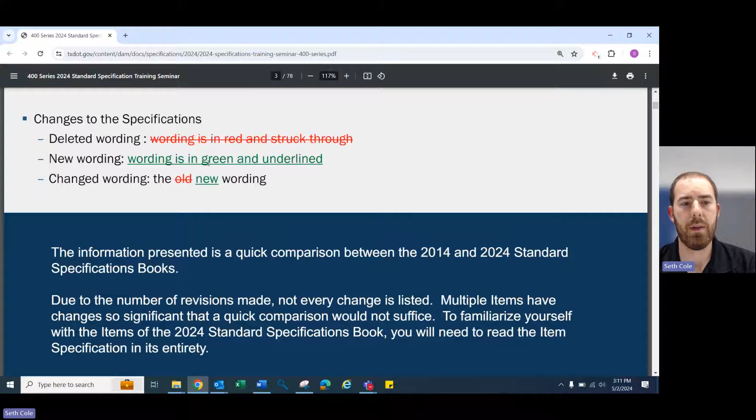As a brief overview, there were 62 items in the 2014 spec book. 2 of them are being retired. There are 2 new items in the 2024 spec book, and so there is still a total of 62 items in the 2024 spec book.

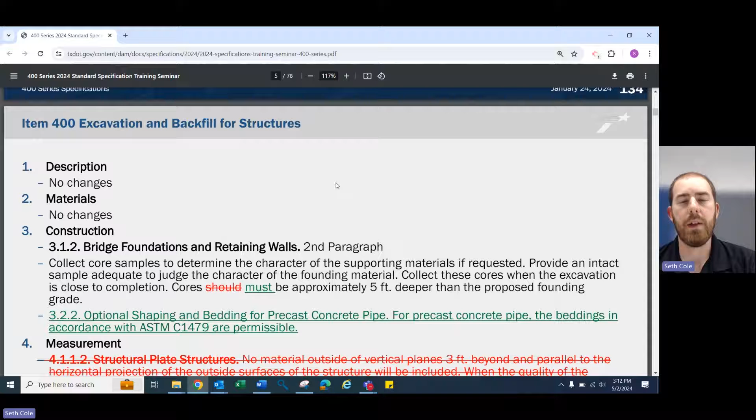Item 400, excavation and backfill for structures. Really no major changes here. A lot of the changes are mostly editorial in nature. I added a paragraph for optional shaping and bedding for precast concrete pipes.

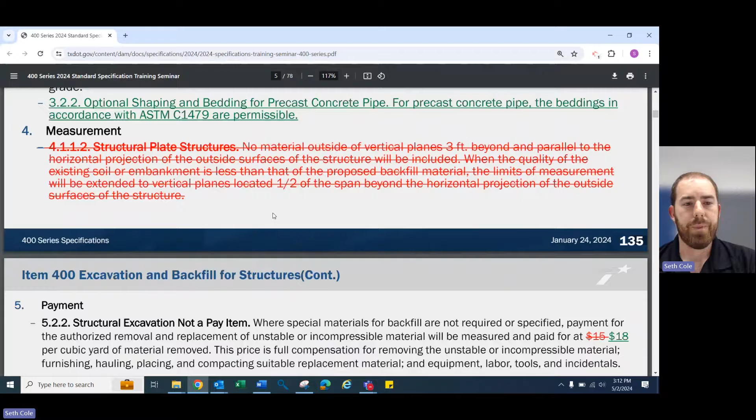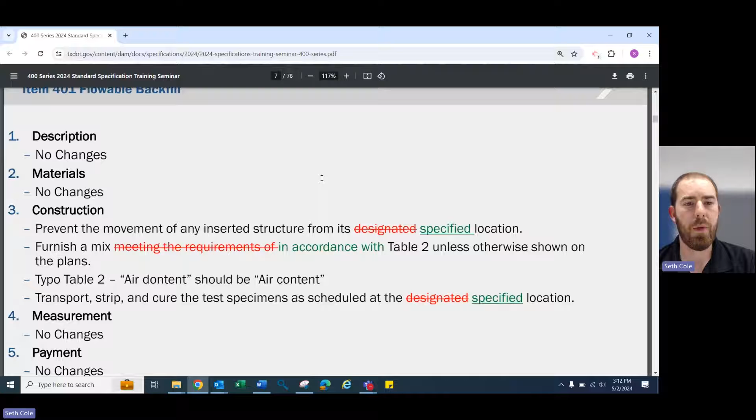Changed some of the payment for when structural excavation is not a pay item. And item 401, pretty much just editorial changes here.

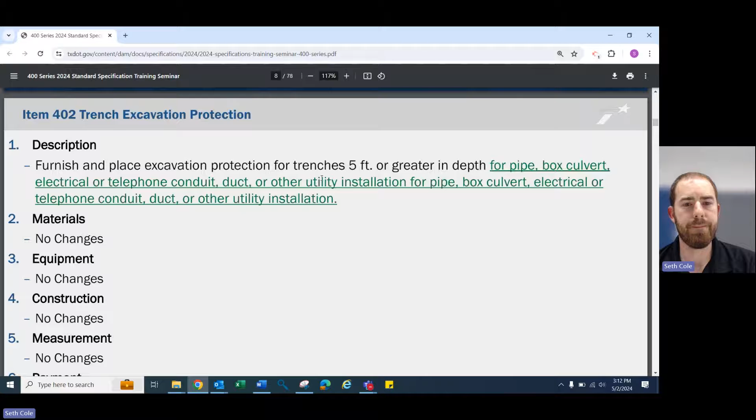402, we added a little bit on to the description of the item. Otherwise, no changes.

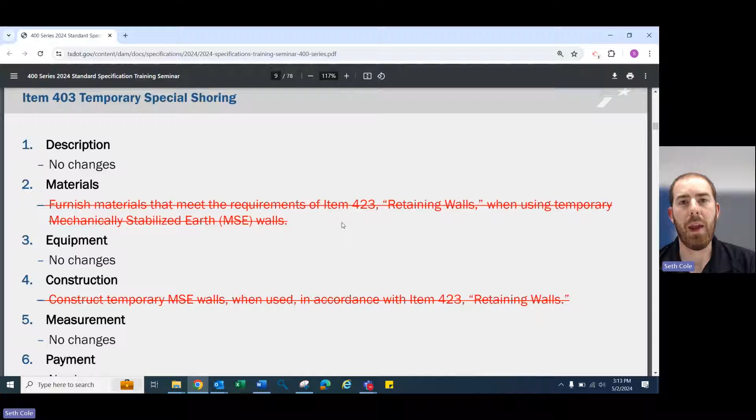Item 403, the change here is that the materials and construction, all these references to retaining walls are basically just moved to that item 423. So temporary walls is going to be handled under item 423 now, rather than temporary special shoring.

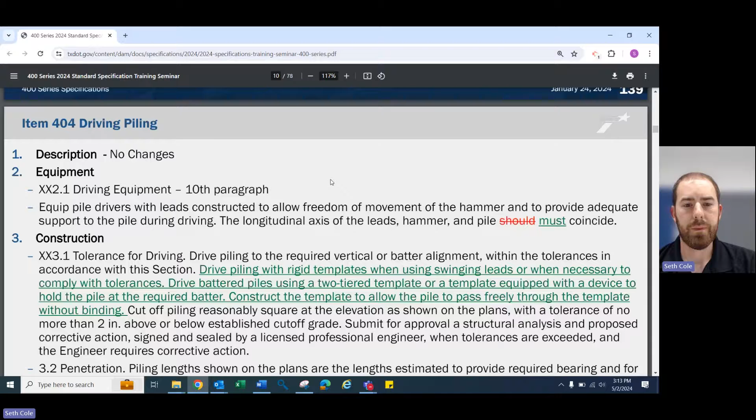In item 404, one of the big changes here is that we added some language to include rigid templates when driving piles under certain situations.

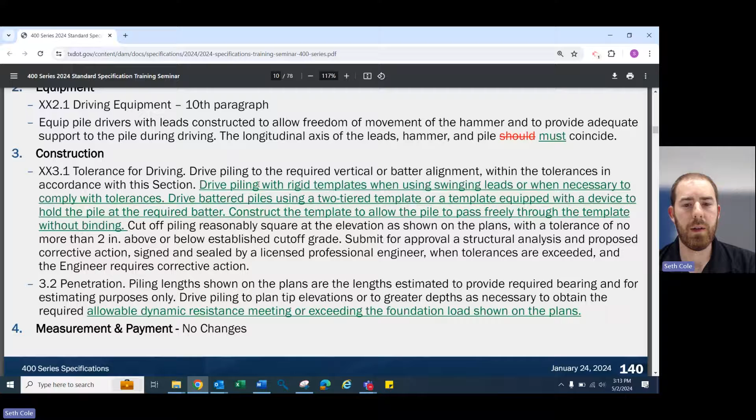Foundation load testing, we added ASTM D8169. A few other minor changes. Timber piling, we added a minor change to how it's measured.

Item 407. The big change here is in regards to the coating, essentially, and most of these changes were in order to get it more in line with item 446, which is field cleaning and painting steel.

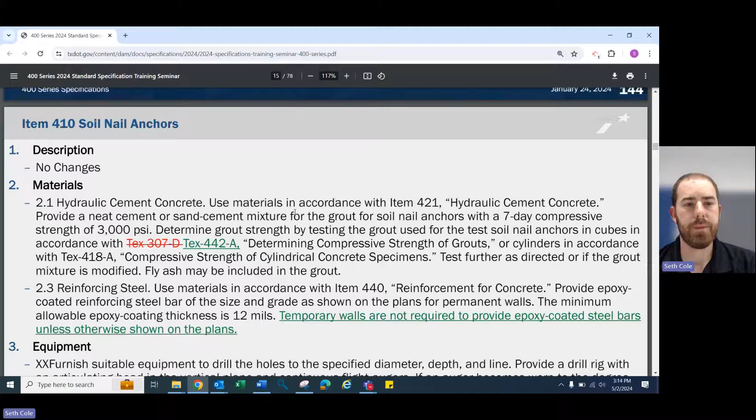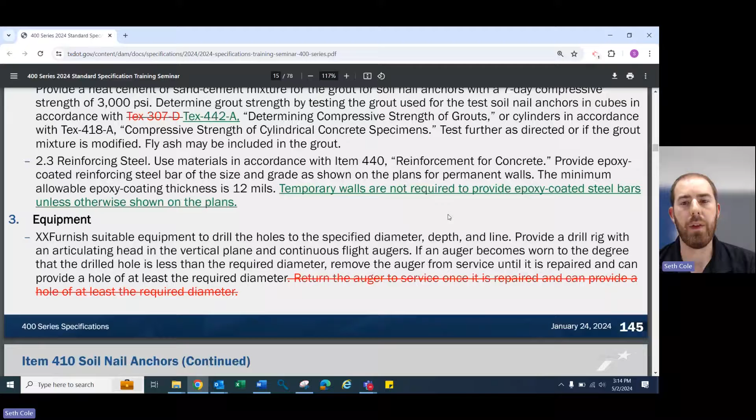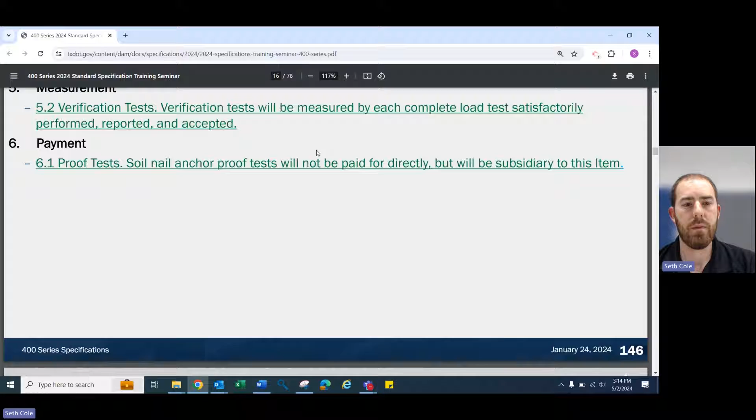For soil nail anchors and rock nail anchors, which are the next 2 items, we clarified in this 2024 version that temporary walls are not required to provide epoxy-coated bars. Rock nail anchors, the same change there.

We added some language about measurement for verification tests and for proof tests.

Drilled shaft foundations, item 416. Basically what we added here is some language to say when a pour would need to be considered a mass placement, and that's for shafts with a diameter exceeding 7 feet. Essentially what we're saying is that you don't have to do a separate mass pour for every single shaft of 7 feet diameter or greater. You just need to do one for each shaft of a different size, or when the mix design changes.

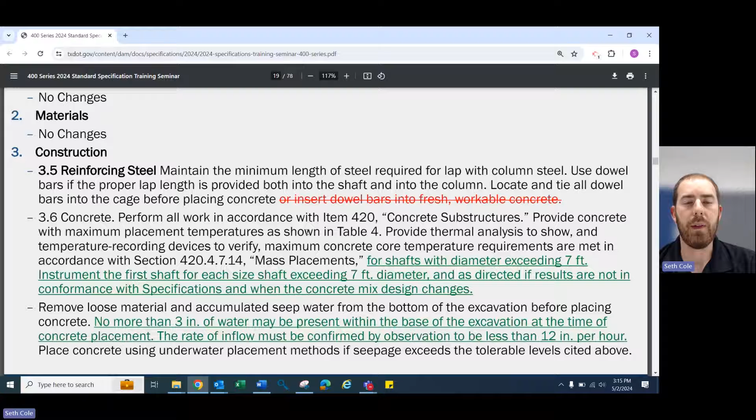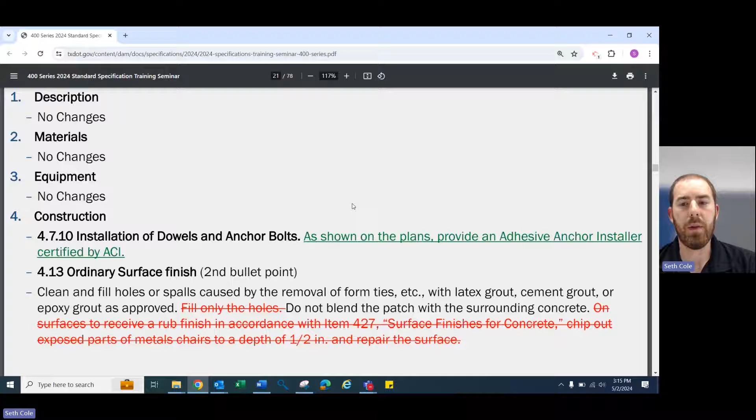Few other minor modifications. Item 420, we added an allowance to be able to use an adhesive anchor installer certified by ACI.

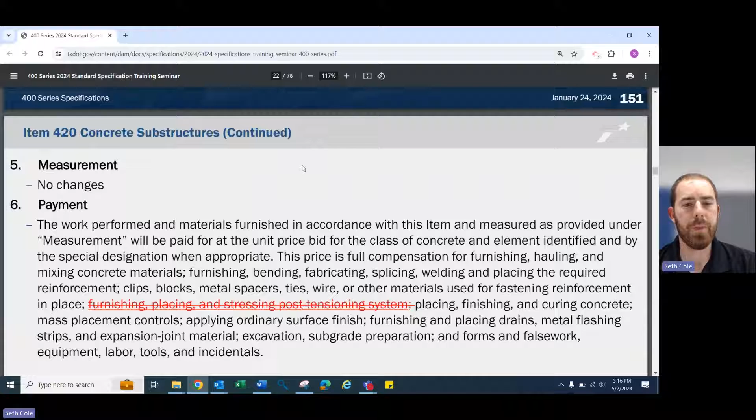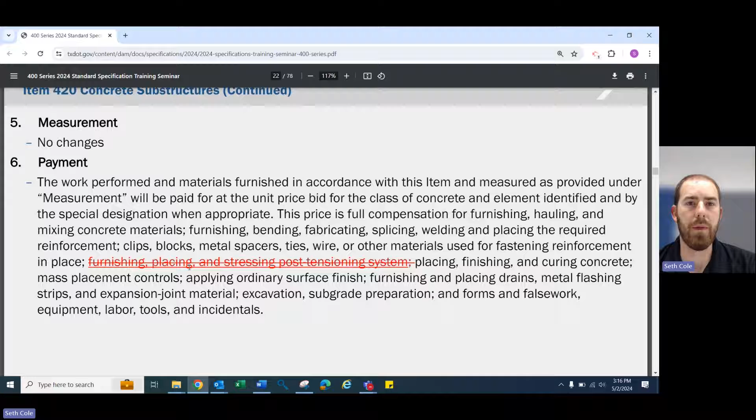We took out some previously confusing language here in the ordinary surface finish. The big change for item 420 is that we took basically payment for post-tensioning out of item 420, and it's now going to be paid for under item 426.

Item 421, there are some pretty significant changes here. We added natural pozzolans in the materials section due to the fly ash shortage.

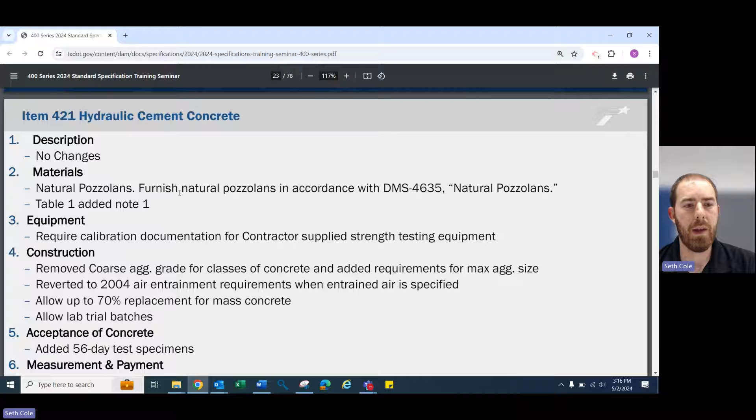We've changed the coarse aggregate gradation. It used to be the class of concrete, and now it's basically based on the dimensions of the member, clear cover, and spacing between reinforcing.

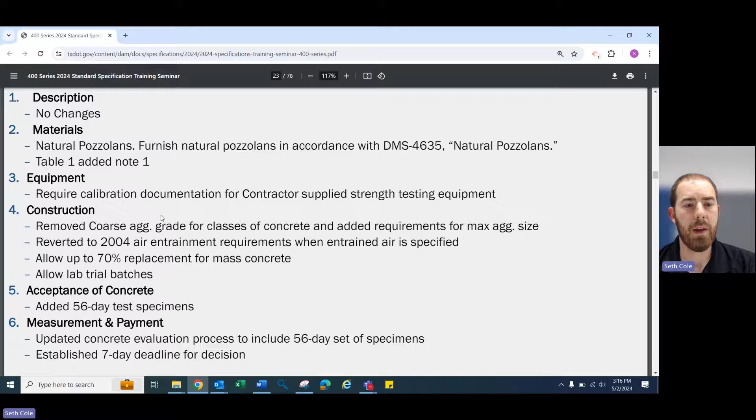We included specific language that allows 56-day test specimens to be made and tested and potentially used as the basis for acceptance.

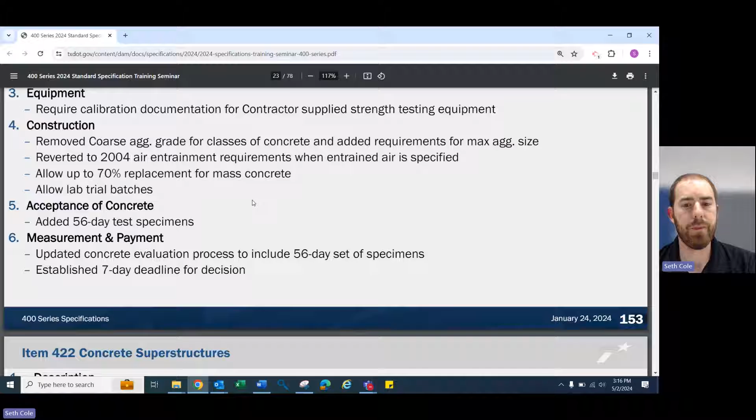Item 422, this is one of the bigger changes to this item, basically clarifying a saturated surface dry condition and when that's met. This change is added to several different items, as you'll see going forward.

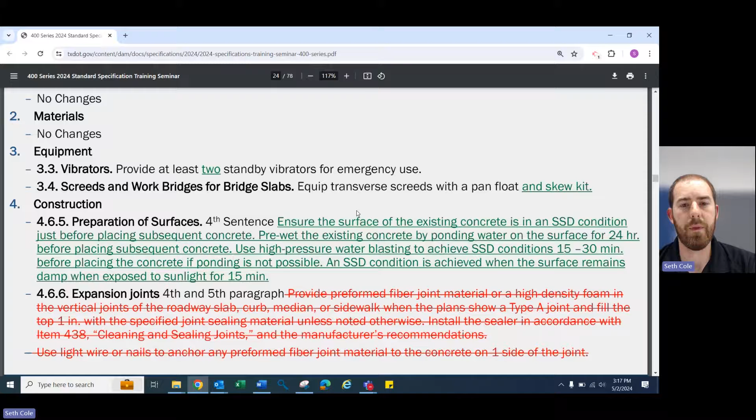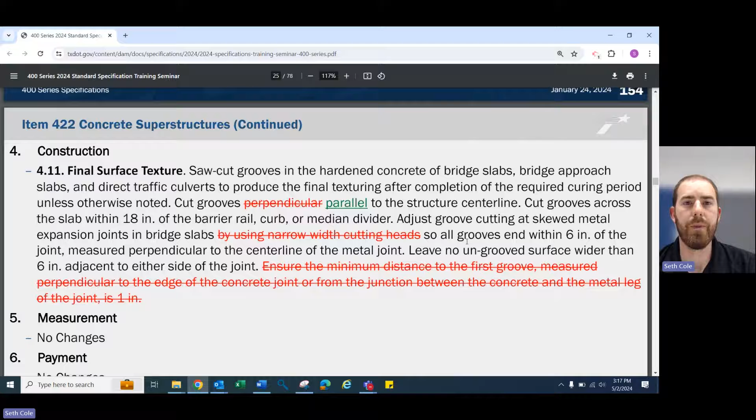The other big change for item 422 is that the default direction for saw cut grooving on the finished bridge deck surface will be parallel or longitudinal along the bridge, parallel to the structure centerline or longitudinal on the bridge. And so we took out any of the language that's no longer applicable there.

Item 423, there's some language added about DMS 4800, which allows the use of proprietary earth retaining wall systems. And we also, like we talked about earlier, we added language about temporary MSE walls.

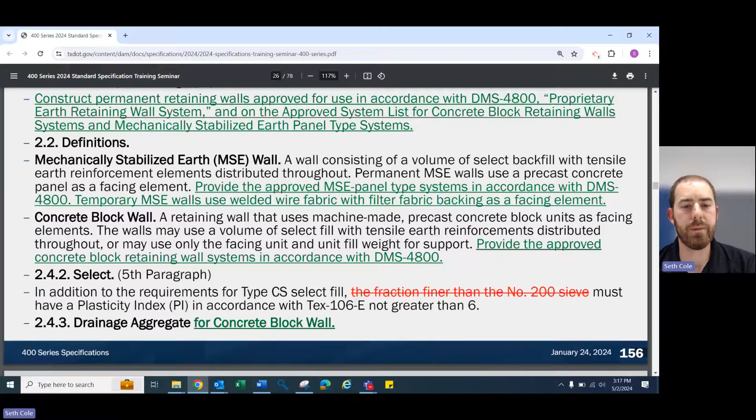Item 424, not really any huge changes here. Ponding method did not actually used to describe a ponding method, and now it does.

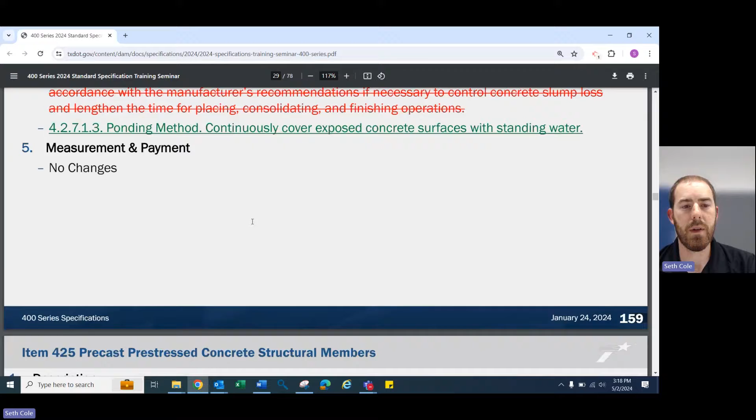425, really no huge changes here, primarily editorial here.

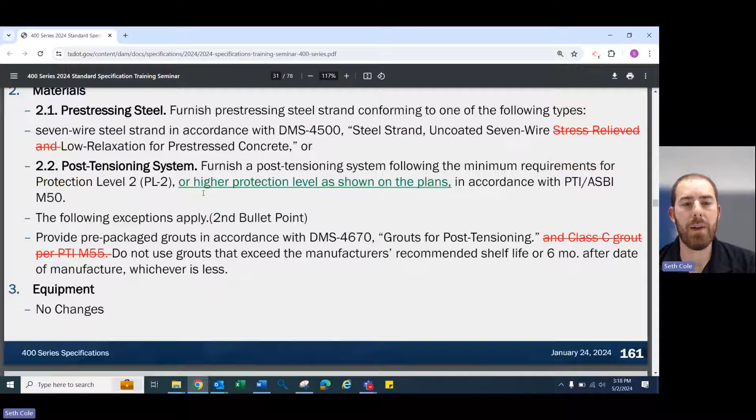Item 426, okay, this is post-tensioning like we talked about previously. We added a sentence to allow a higher protection level as shown on the plans. We added a new article for a stressing safety plan.

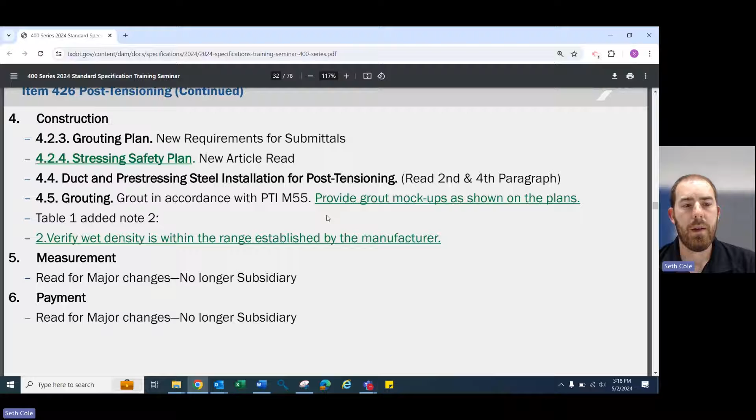Grout mock-ups, verification of wet density, and the measurement and payment, like we discussed earlier, these are no longer subsidiary to item 420. These are going to be paid for by each post-tensioned element, which could be a bent, a column, a cap, or something else defined on the plans.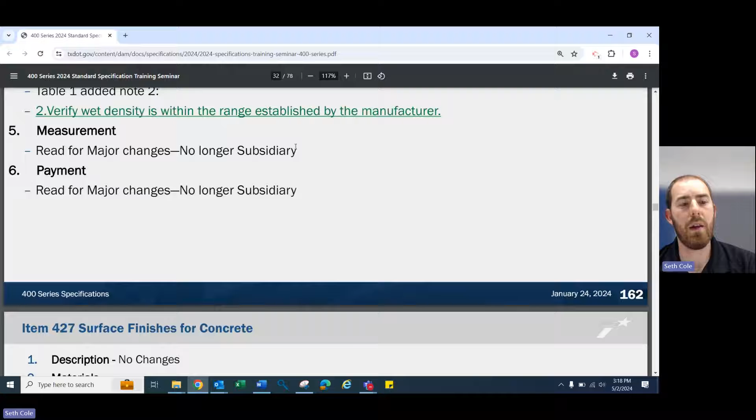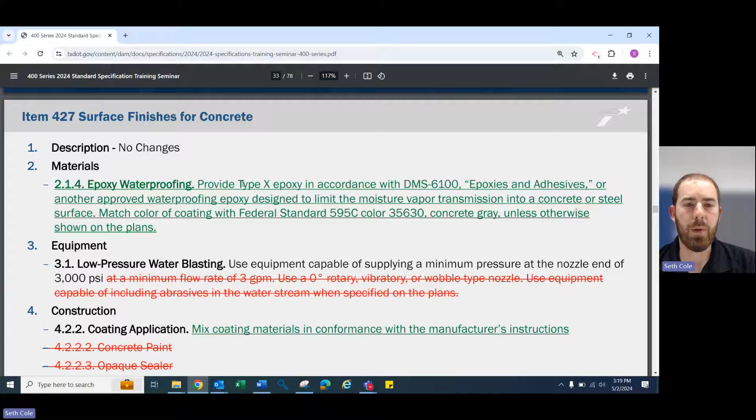Item 427, this is surface finishes for concrete. Basically what we did here is we added language and some paragraphs that describe specifically type X epoxies or epoxy waterproofing. This used to always be a bid code under item 427, but we didn't have any language in the spec describing it. So now we do.

429, concrete structure repair. Added quite a few things to this one since this is becoming a very frequently used item.

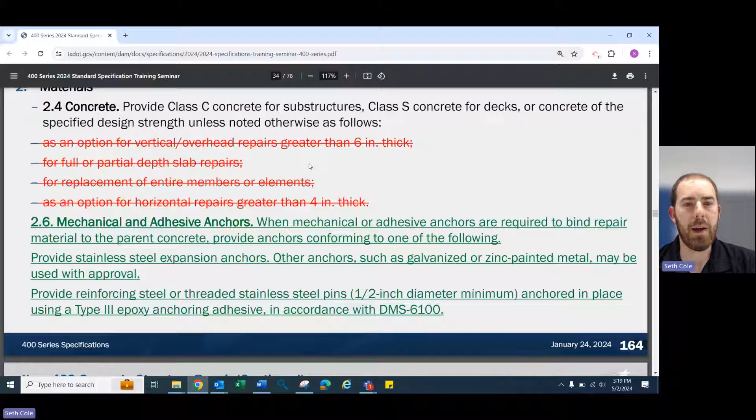Added some language about mechanical and adhesive anchors. And the big change is that we added an entire equipment section to clarify what equipment the contractor would be expected to have on site when performing these repairs.

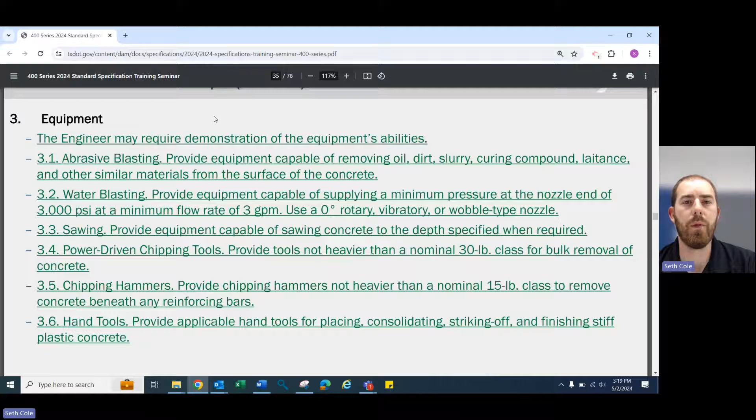We also added that SSD condition and some clarifying language about using a bonding agent.

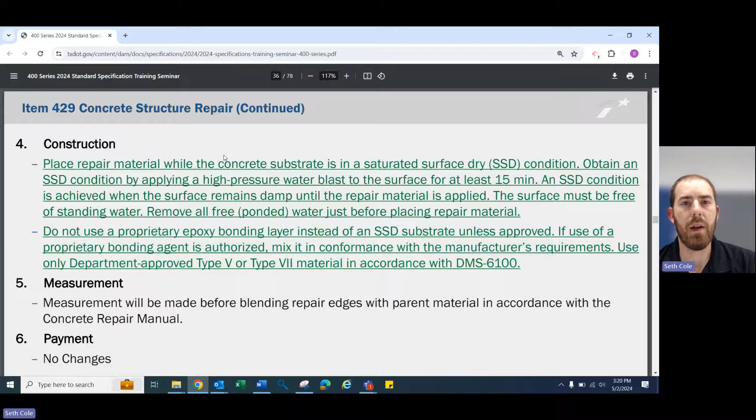Item 431, again language about SSD. Item 432, riprap. There are some gradation changes to stone riprap that are worth reading. I didn't cover them in too much detail in this presentation.

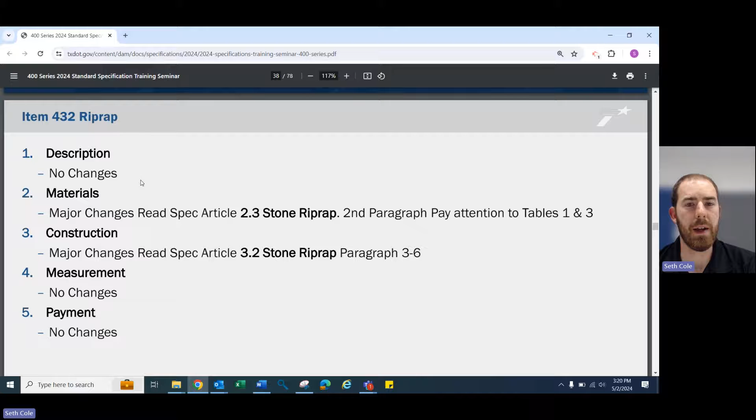For bearings, there are some changes, but this mostly affects the fabrication of the bearing. None of these changes really affect field construction or installation of the bearings.

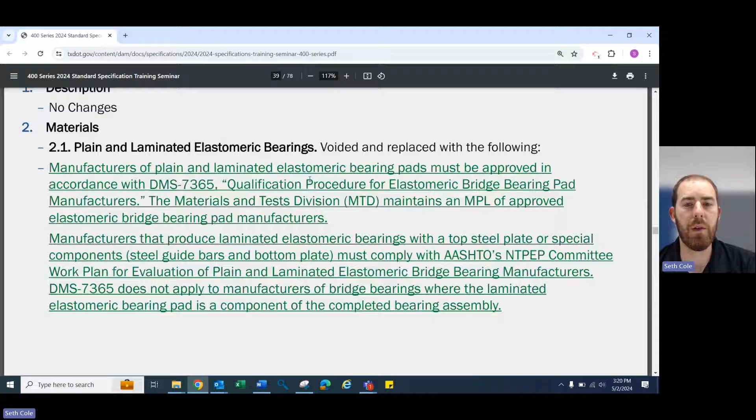Again, more manufacturing related changes.

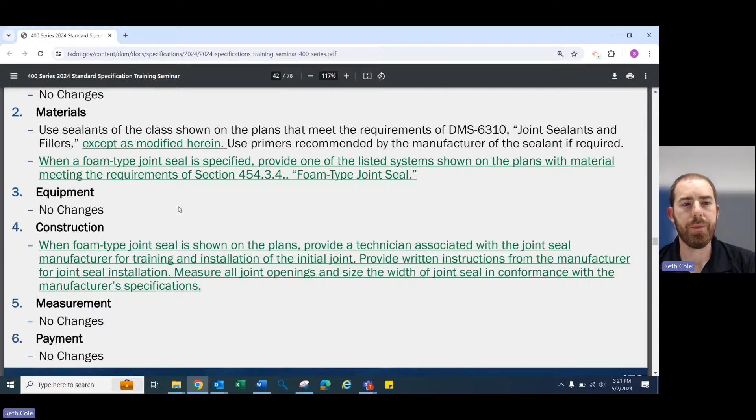Cleaning and sealing joints, item 438. Basically, this adds language for foam type joint sealants. These are pre-compressed foam joint seal systems, which didn't used to be a special provision, but it's now just rolled into the standard specification.

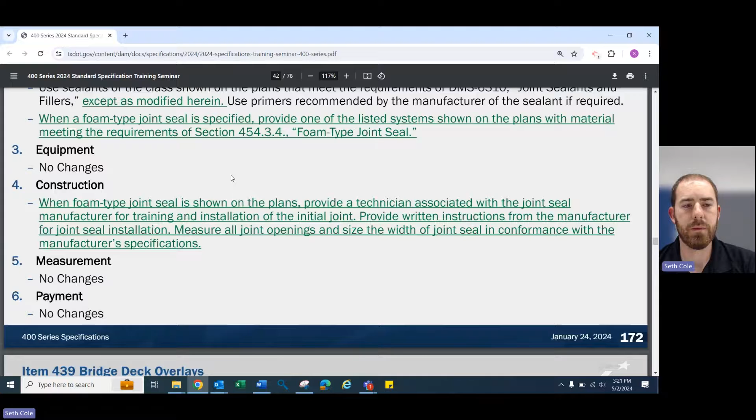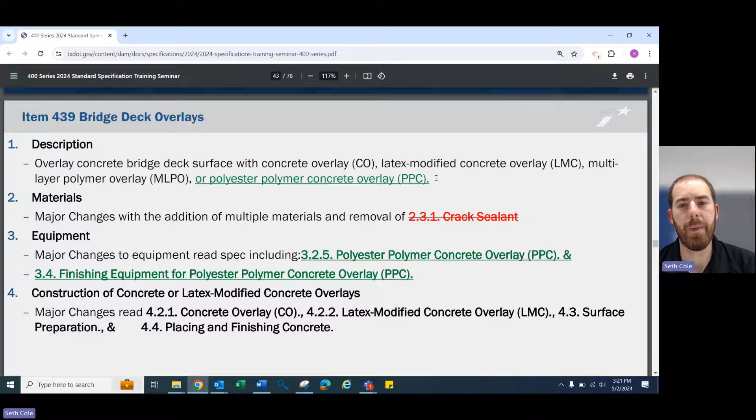For bridge deck overlays, the major change here is that we took polyester polymer concrete, PPC, which used to be a special specification, and rolled it into the standard spec. All these equipment changes and other articles are basically adding the specific requirements for PPC into this item.

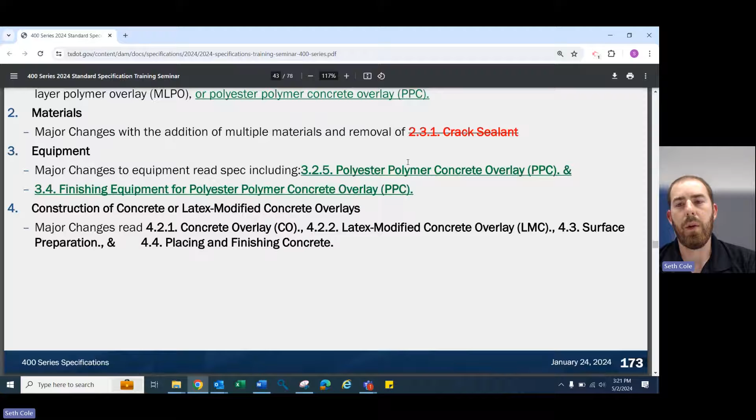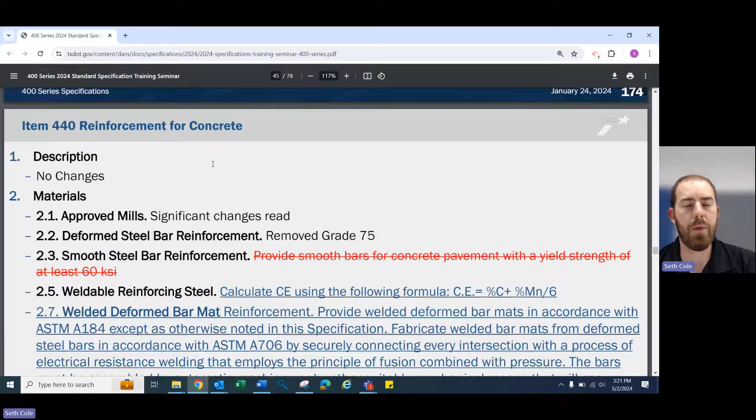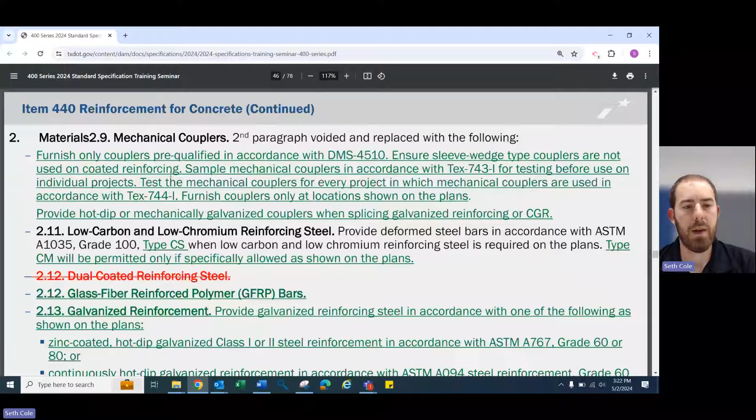For item 440, reinforcement for concrete, there's new language added about welded deformed bar mats, mechanical couplers, and GFRP. A lot of these used to be special provisions, but they've just been rolled into the standard specification now.

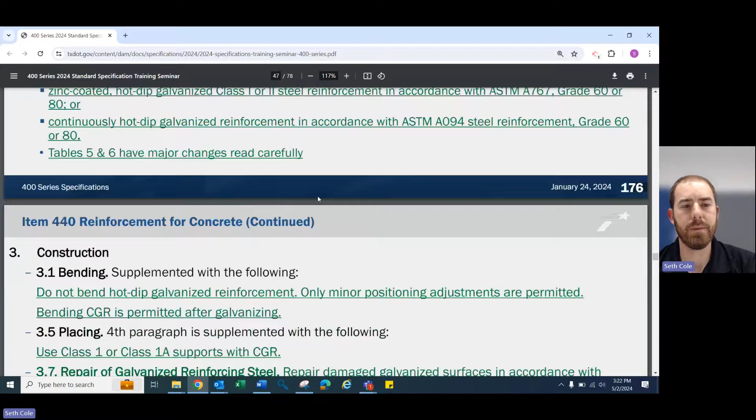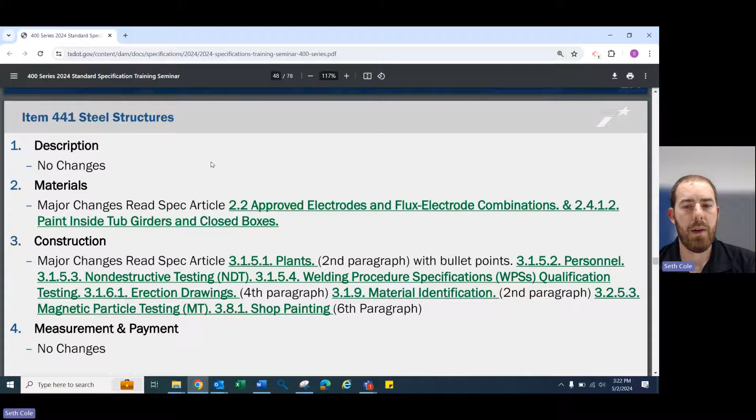Steel structures has had some fairly major changes. A lot of these are manufacturing or fabrication related, not necessarily construction or installation related. So I didn't go into a ton of detail here, and I would encourage you to just read the specification for more information.

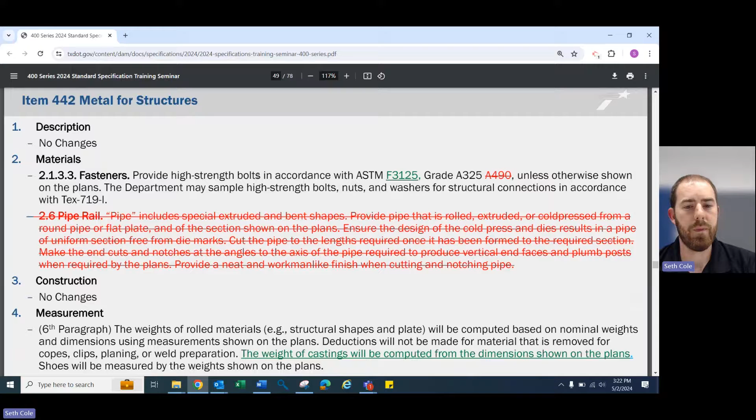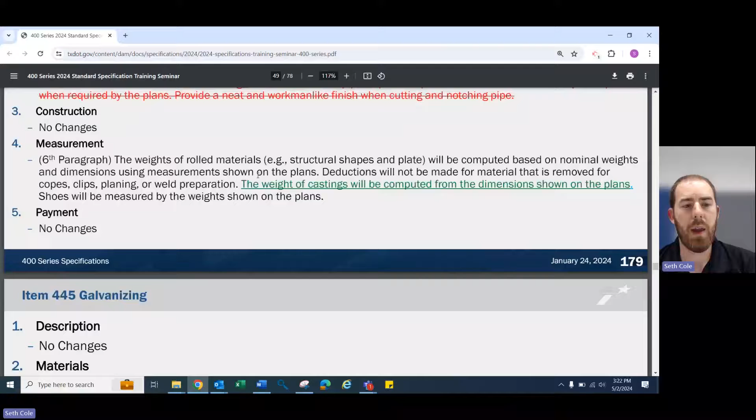For items 442 and 445, a lot of these changes are just getting things in alignment with current ASTM specifications.

For item 446, field cleaning and painting steel, we took out system 1B, which was overcoating in a high corrosion environment. The reason is that if you're in a high corrosion environment, a simple overcoat is not going to be effective. You need a much more substantial level of protection for that type of environment.

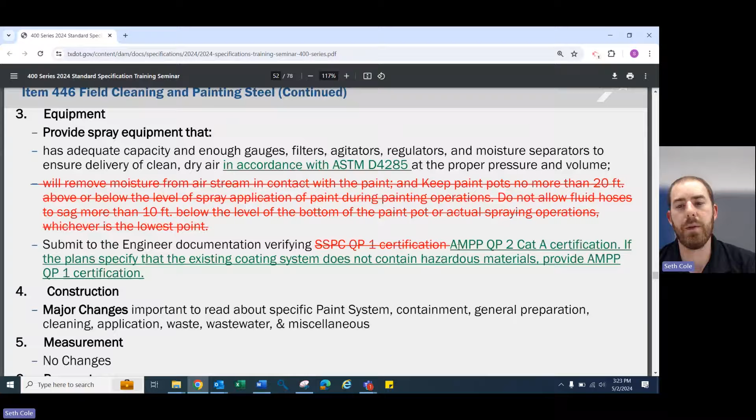A couple other minor changes. Some of the language was changed to read AMPP instead of SSPC.

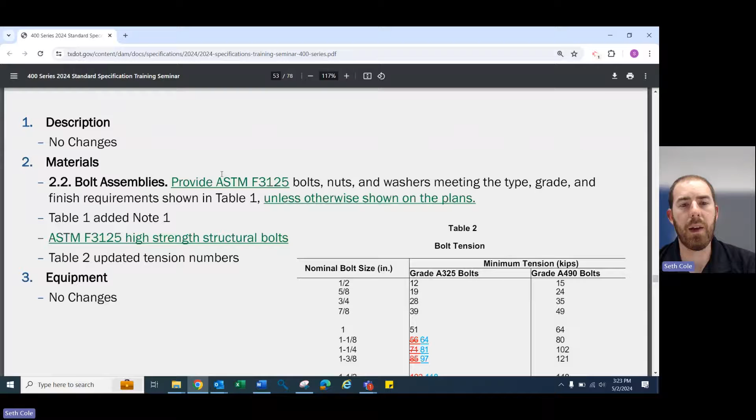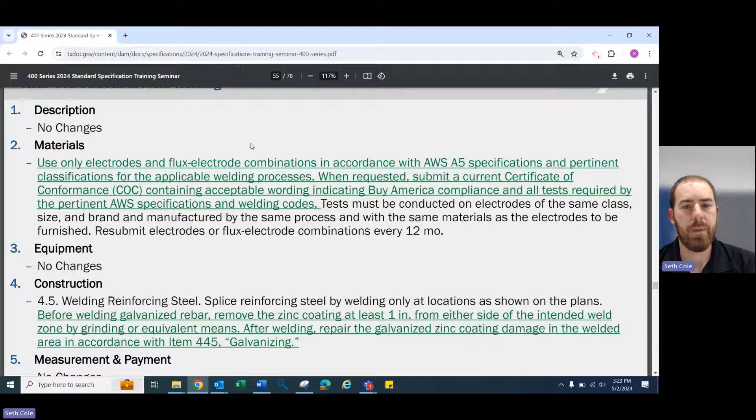Structural bolting, again a lot of these changes are to bring things in line with current ASTM specifications. Same with anchor bolts, a lot of it is ASTM specification related.

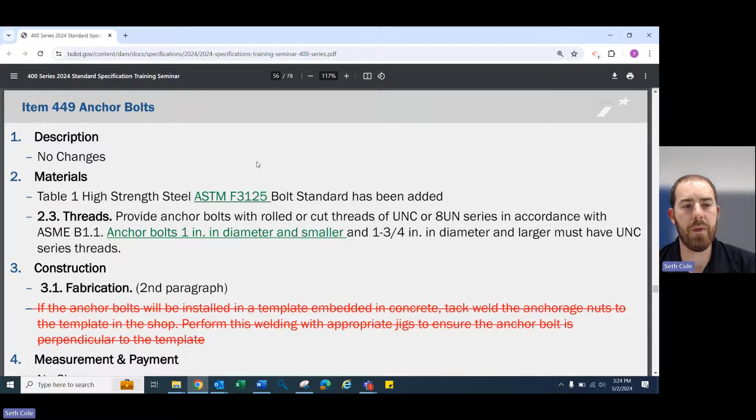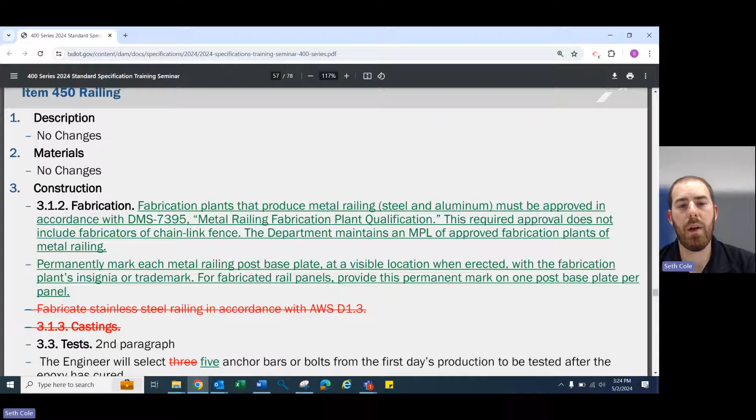Item 450, railing. Similar to the bearing pads, a lot of the language added here is primarily related to manufacturing or fabrication. This DMS 7395 describes metal railing fabrication plant qualification.

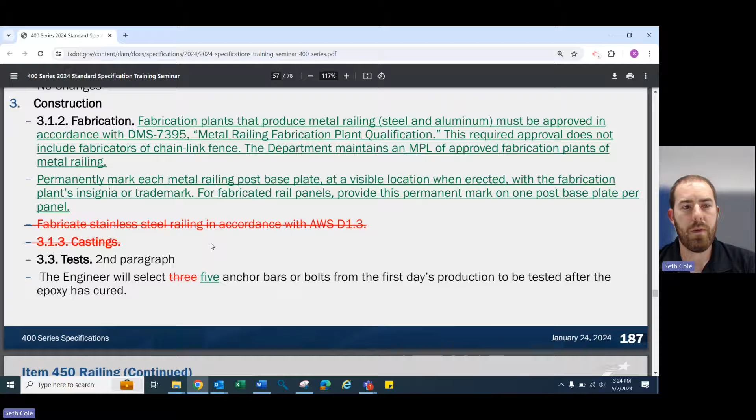Item 454, bridge expansion joints. This sentence, provide backer rods that are circular and are 25% larger than the joint opening, was taken from the bridge standards we have and added into the specifications. Additionally, we added a paragraph about foam type joint seals, like I discussed previously, and the type A joint, which used to be considered subsidiary to the slab.

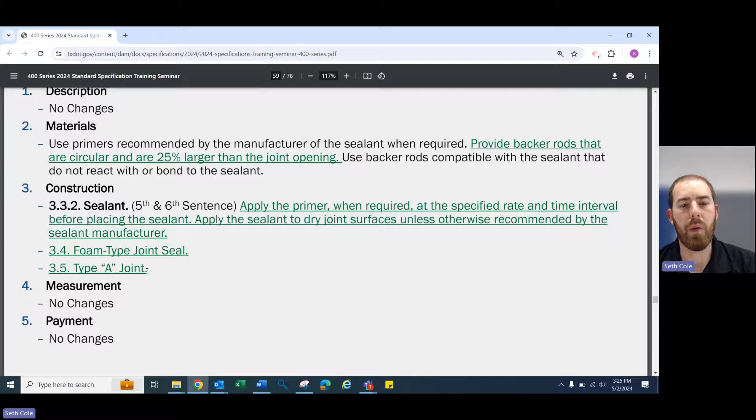It's now going to be paid for as its own item. A type A joint, what we mean by that is just the backer rod and a class 7 sealant on top.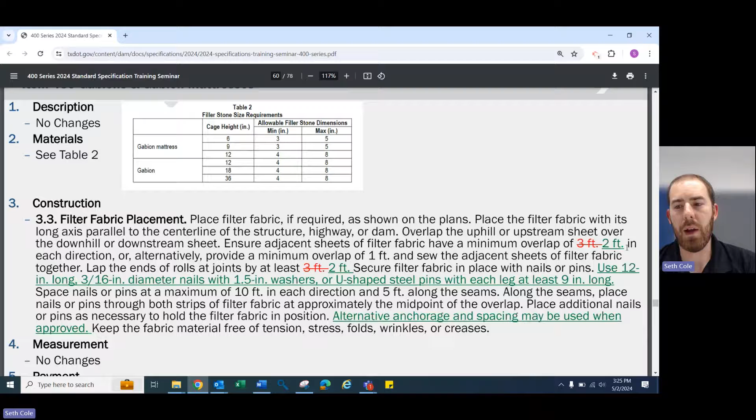Gabions and Gabion mattresses, there's a lot of minor changes about how to secure the filter fabric. A few minor changes for corrugated metal pipe.

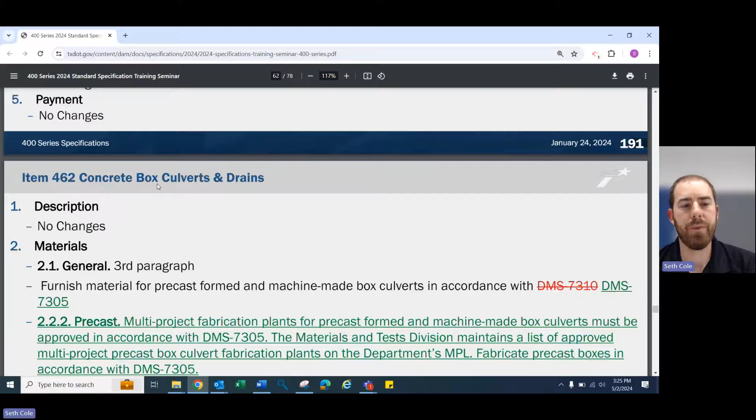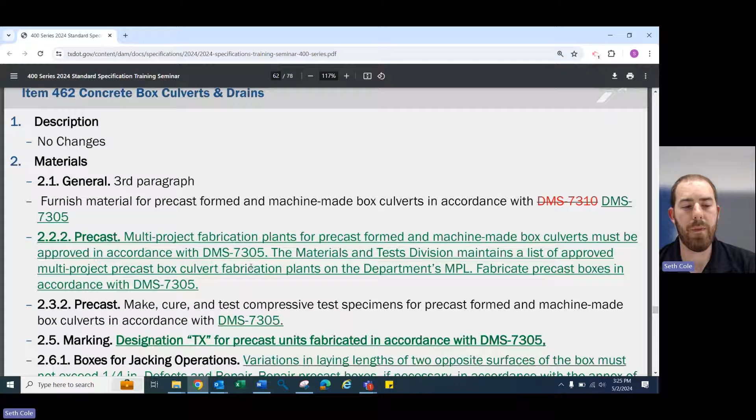A lot of the changes for the next few items are all related to this DMS 7305, which basically governs the fabrication of these precast drainage elements. Again here, these are all changing this to DMS 7305 and associated changes. Same for item 465.

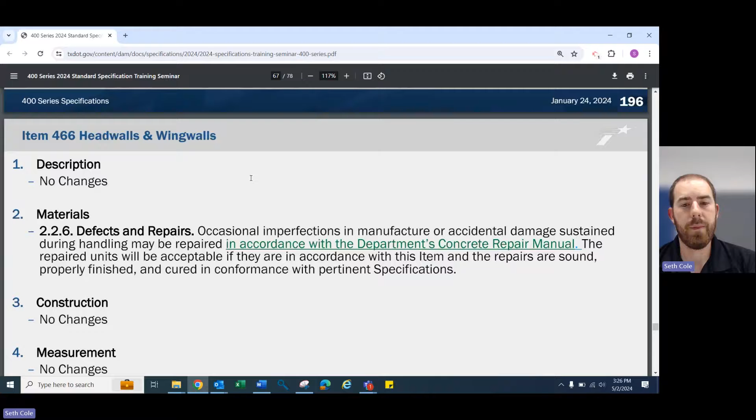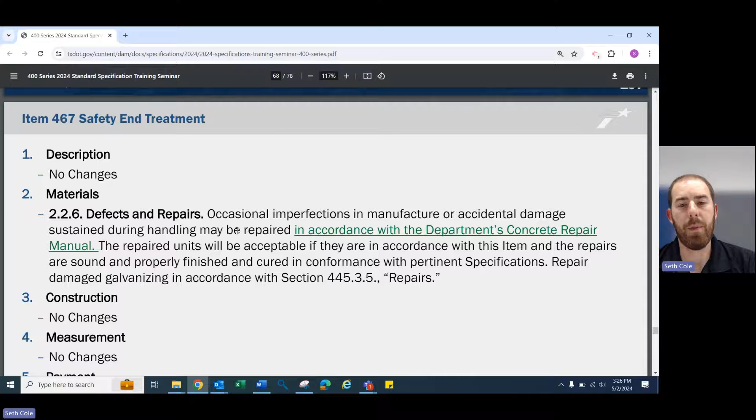Very minor changes in item 466 and 467, clarifying that the repair should be made in accordance with our concrete repair manual.

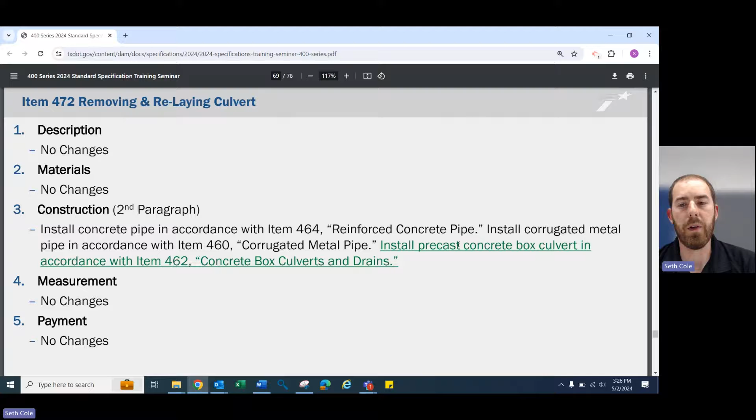This is another just clarifying sentence. More clarifying language in item 474.

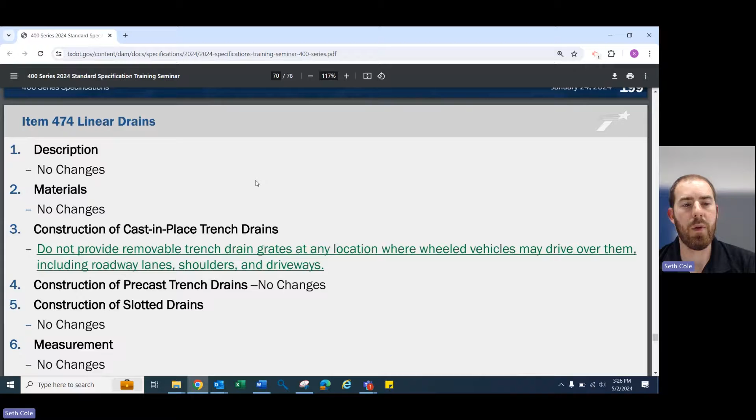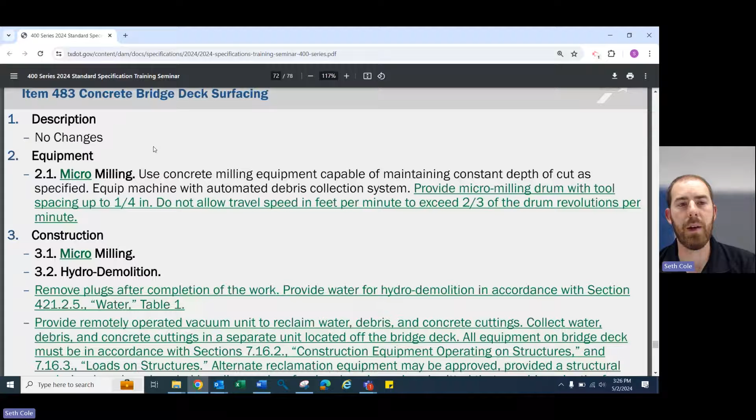Bridge deck surfacing. Essentially what we've done in bridge deck surfacing is that we've changed any milling that's going to be performed on a bridge deck to be a micro mill. So we added language here.

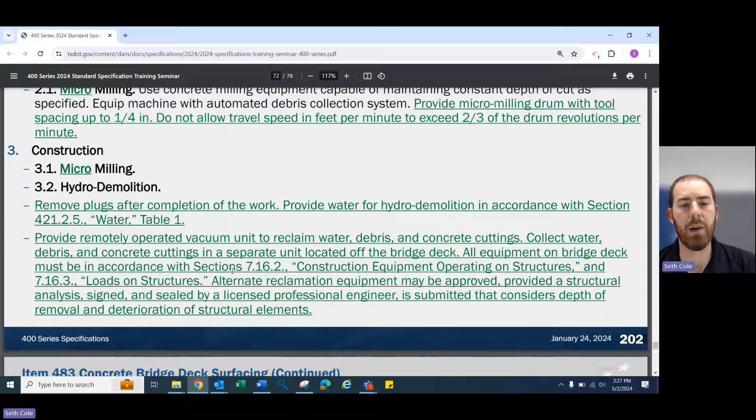We also added some additional language governing hydro demolition on a bridge deck, essentially saying that any equipment that's on the bridge deck for hydro demolition needs to be evaluated in accordance with item 7, because these units get really heavy and we're taking section off of our deck.

So for the deck, we're requiring an analysis to be made considering the equipment weight as well as deterioration to the deck or removal of material from the deck.

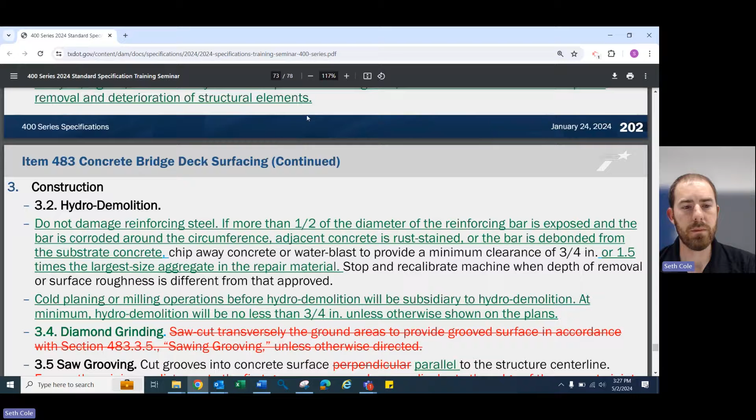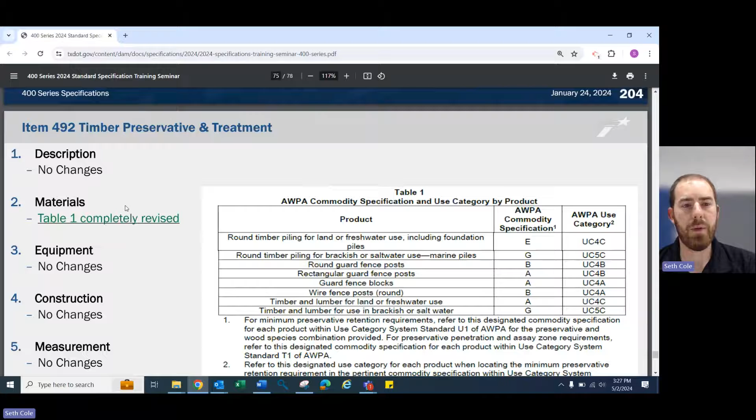Item 492 for timber preservative and treatment. Basically, the major change is that table 1 is completely revised.

Item 495, raising existing structures. What we wanted to do with this item was to clarify and isolate payment for raising the structure from payment for associated work. The associated work could be, for example, raising the structure in order to perform repairs under a beam, or to replace a bearing.

The idea is that we want to make sure that the contractor is getting paid, one, to raise the structure, and then separately for any other work that they have to do in addition to that.

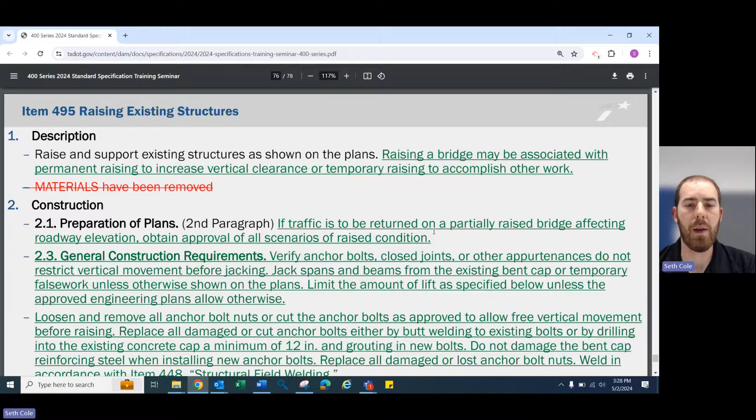That concludes the 400 series items.